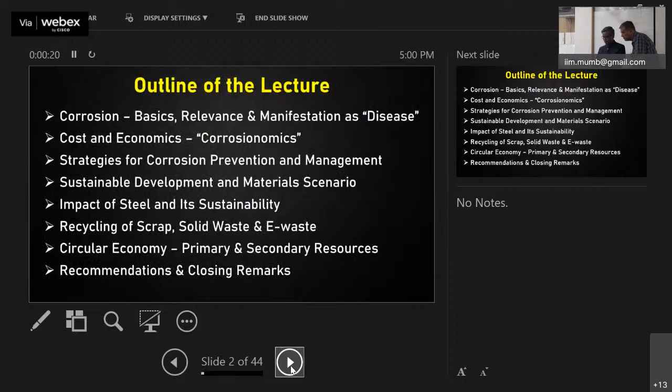Every week, huh? Good morning. Okay, yeah. To get it, huh? Is that it? Yes, sure.

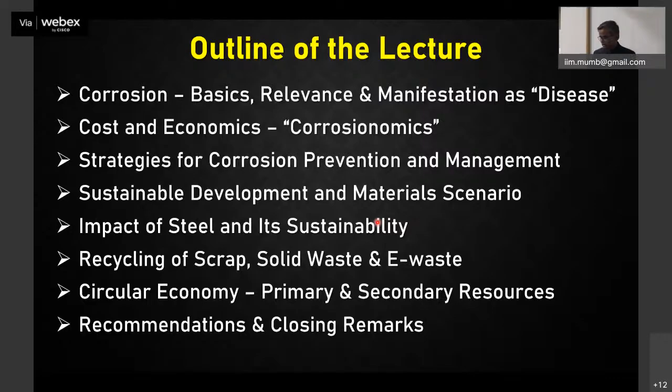The first question that comes to mind for anyone unaware about metals and alloys is that, except gold and platinum, all metals will corrode in service. Steel is a beautiful example: just finish and polish it, keep it outside, and within seconds or minutes you will see the first layer of rust covering the entire surface.

If you look at the corrosion cycle, every metal is available as a mineral compound in the earth's crust. You mine it, excavate it, do mineral beneficiation, then melt it, grind it, make alloys, and fabricate them into various products that can be put into service in industry.

And there comes the role of corrosion, affecting the service life of these components, where corrosion plays a major role, either due to an intended corrosive service environment, or due to external air, moisture, or environment. Finally, corrosion becomes one of the major degradation mechanisms, causing components to prematurely fail, and you lose the metal there.

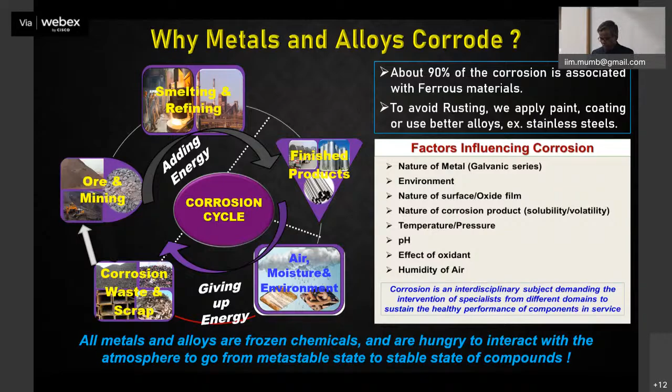For the betterment of the students, the young students here, corrosion is a very simple subject, but we make it very complex. We think so many chemicals are involved, so many things are happening just for rusting. If you write 10, 20 equations, you get an allergy for it - so many equations are brought in, Nernst equation, Butler-Volmer equation, so many things are brought in.

As simple as this: you put a small iron piece into dilute hydrochloric acid, and immediately, in a few seconds, it's seen bubbling. A very simple reaction is happening - iron reacts with hydrochloric acid, producing iron chloride and hydrogen. I can split this into two simple reactions: the metal going into a higher valence state as an ion, releasing its valence electrons. Fe becomes Fe2+ with 2 electrons, or Fe3+ with 3 electrons, depending on the number of valence states - aluminum 3+, niobium 5+, titanium 4+.

You can think of this for any metal that you put into an acid. Acid contains a lot of hydrogen ions, and these ions can get reduced by consuming the electrons. When you put a metal in, it simply dissolves into an ion, releasing electrons. The electron is just taken by the hydrogen to become hydrogen gas.

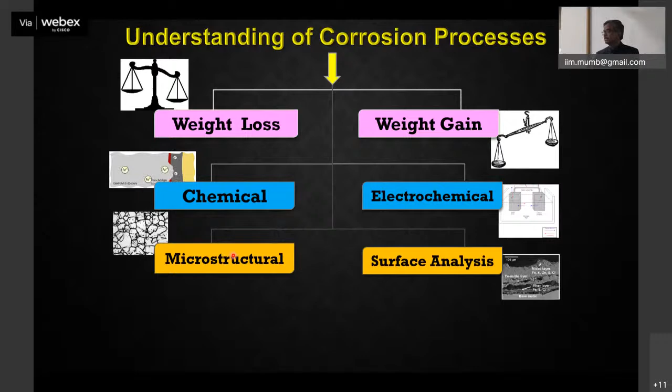Then came very strong metallurgical and surface modification analysis, where the microstructural effect was given structure-property relationships. What is the microstructure? You take stainless steel, there's welding in your group, there's a delta ferrite coming - in some cases that will have a problem. Otherwise you heat treat it, it gets sensitized, forms chromium carbide in the grain boundary, and that leads to chromium depletion. So it depends on the microstructural condition and the surface layer. If you're doing nitrogen ion implantation, it forms a layer less than a hundred angstroms - very thin, but it gives the highest protection, as in an orthopedic implant made of steel in the human body.

So depending on the surface, depending on the layer formed, the microstructure - more and more chemical and metallurgical interdisciplinary theories developed. Today, with the advent of scanning tunneling microscopes and similar tools, we are going more and more into the nano dimension to understand alloy dissolution theory, kinetics of alloy dissolution. The same way you can understand deposition starting from atomic scale, so you can make nano layers, multi-layers for electronics and other applications using this principle. This is what's happening with respect to understanding corrosion.

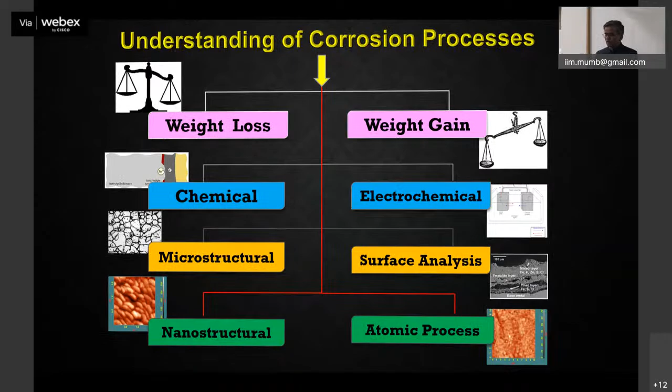But corrosion always initiates at the surface - with every metal, whatever you have made, there is a discontinuity at the top surface. You have dangling bonds, they're highly energetic, looking for interaction with the atmosphere. So you always have corrosion initiating at the top surface.

There will be so many imperfections - some secondary precipitate, grain boundaries, dislocations cutting at the top surface. You will have a lot of such defects on the surface where corrosion can initiate - at the grain boundary, at some inclusion, or secondary precipitate. Even in a single crystal, there will be a lot of kink site atoms on the surface, extra ledges. So whatever is there, corrosion can initiate.

It's not only this surface heterogeneity, they also need a suitable environment that will accelerate the corrosion. It can be neutral, acidic, basic, or anything - atmospheric corrosion, aqueous corrosion, or a gaseous environment. Corrosion will initiate at the surface.

Once it initiates, that is what corrosion is - something happening on the surface. As everybody knows, corrosion as rusting - the rusting is uniform on the surface, you will see. Take a stainless steel, there is nothing like rusting, you won't see anything, but one day you'll find the stainless steel completely breaking into two pieces. That is because it can undergo stress corrosion, maybe in a chloride environment. People say that even in ambient conditions this can happen.

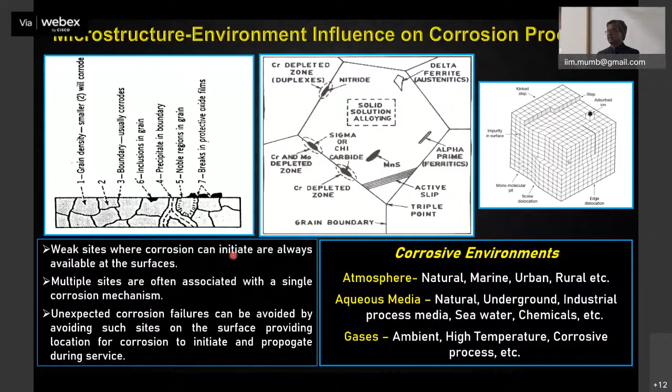So there are a lot of opportunities for corrosion to manifest into different forms - that is where the types of corrosion come in. Earlier, people knew that there are 8 forms of corrosion. If you take the Fontana and Greene or the Clay book, you will find 8 forms - famous lectures that will be conducted. Today, microbiologically influenced corrosion is the 9th form.

So uniform corrosion is the one that is rusting, whereas other types of corrosion include pitting corrosion, formation of a hole; crevice corrosion between two joints; intergranular corrosion, between the grain boundaries; and hydrogen embrittlement - hydrogen is very light, it can penetrate wherever there are cavities or defects in the metal matrix.

Galvanic corrosion - between two dissimilar metals, the weaker one will undergo corrosion. Erosion corrosion, where there is a flow medium involved. And fretting corrosion - very low amplitude of movement, very low frequency, like orthopedic hip joints in human body fluid conditions can undergo that kind of fretting damage. Stress corrosion cracking, you must all know very well - Raja is a very established person on that.

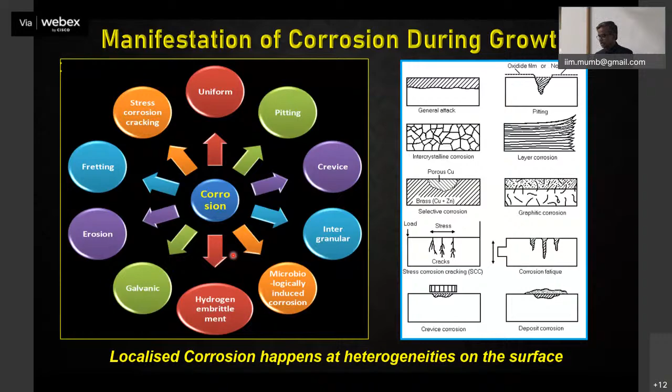So these types of corrosion lead to growing damage in the component. So what happened with the gas around - 40 metric tons sitting in the tank? This tank was overpressurized during the studies. There are two things - one is corporate mismanagement without any safety protocols, second is human error, people just not following the rules there.

So that led to a runaway chemical reaction because of the rusting that happened - the iron in the rust reacted with the methyl isocyanate and led to a chemical reaction. That caused a huge explosion of the tank, and the entire 40 metric tons of gas came out, leading to 5 lakh people instantaneously getting affected in Bhopal. So just imagine that simple corrosion, rusting, where iron oxide is produced - in fact, it is the same thing.

So what are the impacts? Wherever corrosion is happening, whether it is in an industry like the Bhopal gas tragedy with the Indian plant, or in a public place like a bridge, a water tap, a pump, or a water pipeline, anything you see in public or in an industry, when corrosion leads to failure, the impact is going to be very significant.

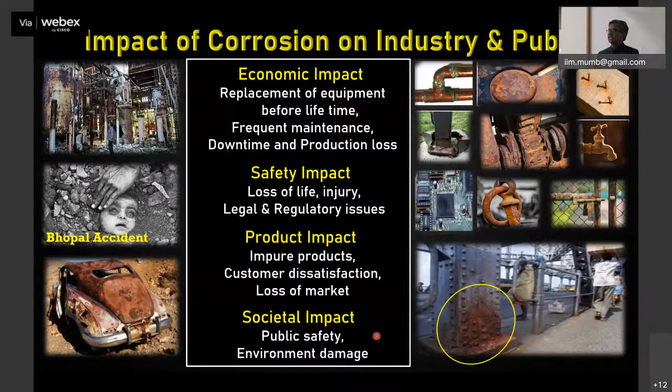Then there's customer dissatisfaction. If your product is compromised, having more unwanted elements when you look at the chemical assay of a product, then the customer is not satisfied. They will also lose the market and go to the competitor for better products. Finally, the societal impact: public safety is affected, as in the Bhopal tragedy, and the environment is getting damaged. So all these impacts of corrosion in industry and public life lead to loss in economics.

It costs so much, it has so much impact on the economy. In the year 2002, the United States Federal Highway Administration, on the instruction from Congress, conducted a corrosion cost study that found around $276 billion in costs in the United States.

Recently, in 2011 to 2012, NACE International, the National Association of Corrosion Engineers, conducted a study called the IMPACT study, that is, International Measures of Prevention, Application, and Economics of Corrosion Technologies. They found that the worldwide direct cost is about $2.5 trillion, which is 3.4% of the GDP of industrialized countries.

You can see here that the average is 3.4%, and the United States is about 2.7%. India is here at about 4.2%. And if you look at Japan, which is most advanced in corrosion control technology, it's 1%. So the average is about 3.4%.

The GDP of our country is $2.94 trillion in 2019. If I take 3.4% of that, it's about $102 billion, which is roughly 7.2 lakh crore loss. This is huge money that could be used for at least 2 or 3 states' annual budget in India. So that is the loss that we make, but it never gets attention in this country.

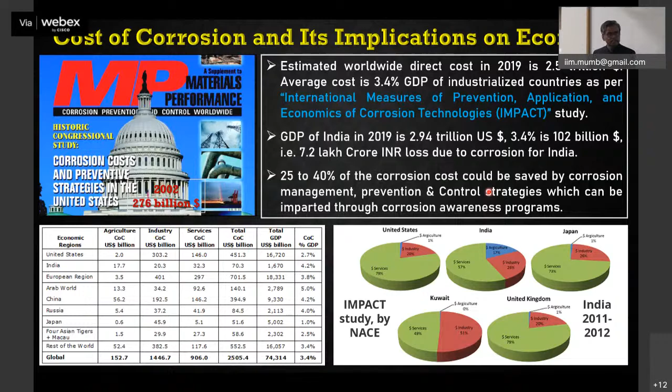If we let that happen, corrosion is happening now. How can I reduce this cost, and is there a simple method? There are different ways that one can do this.

Starting with the proper selection of material, maybe the first choice is that you have chosen a correct material. Second, you should adopt best engineering practices when fabricating, building, or treating the metal component before putting it into service. Third, besides the choice of material and fabrication procedure, you use protection like cathodic protection or anodic protection.

Then, even if you're not able to control it with that, you go for a higher alloy, a better alloy. Maybe steel is not useful, so you go for alloy steel. If alloy steel is not better, you go for stainless steel. Not good, you go for nickel alloy. You can go for titanium alloy, zirconium alloy, depending on the requirement.

Then, for something like a cooling water system, almost every industry will have one, and corrosion inhibition is very important. It looks like a routine thing, steel and water combination, but it causes huge economic loss in the country. So corrosion inhibitors can be protective metallic or protective organic coatings.

This is the kind of toolkit that I would recommend people use for managing corrosion and saving costs. But the problem is that we know all this, so how do we apply it? This is what is very important. That's where you have to become a specialist who can do this.

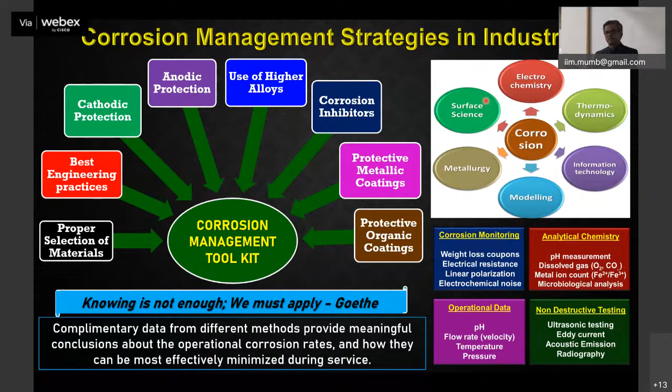You cannot just monitor the water parameter in the pipeline and expect to control the corrosion. Or just monitor the integrity of the pipe and control the corrosion. It is not possible. It is an interdisciplinary approach that you have to use for corrosion management.

I want to stop the corrosion. So what are the things I can do if I know the management tool? Number one, I should put in engineering practice, choosing the best material-environment combination based on experience and literature.

Second, I should reduce whatever possible stresses during application, whether residual or service stress. But one more important thing: whenever you use any code, practice, or procedure, it has to be followed completely in the design, fabrication, and operation.

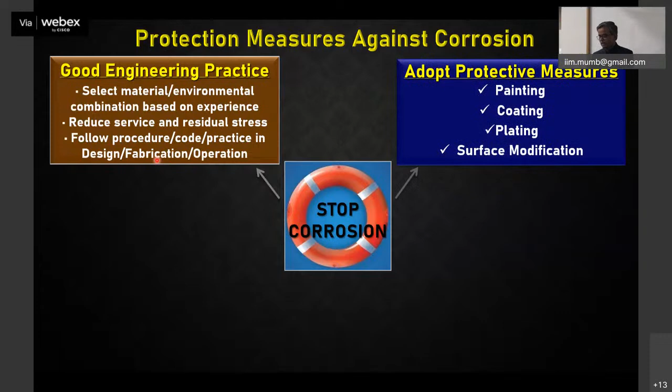You should also have some protective measures, like painting, coating, plating, and surface modification, better material, improved material, and an improved environment. You have to use some inhibitor, some quality control, and some online injection of certain chemical species. So whether it is an engineering practice, a protective measure, a better material, or a better environment, all of this can stop corrosion.

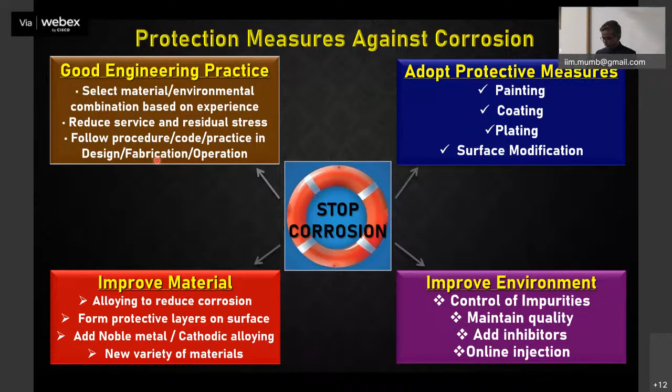But ultimately it cannot be 100% stopped, because corrosion is a natural phenomenon, it will happen. We are only delaying it so that we can use at least 90% of its performance, not 100%. So what are the preventive strategies in management and prevention control?

We should, in the beginning itself, try to have the life prediction, life cycle, and performance assessment of the component, so that you anticipate, after so many cycles of service or years of service in the plant, what problems will come. By envisaging this in advance, you should take adequate preventive steps at the right time.

You should also have some innovative corrosion technology tools. Many of them have to be established through research, development, and implementation. For example, some online corrosion monitoring tools, innovative tools like electrochemical noise, a new technique.

Now, how can we utilize this electrochemical noise to understand the fundamental signature of current that is coming over? The electron release is nothing but the current. So how finely can I measure this? This is like a signature of the initiation of the corrosion. So all this can be done through research.

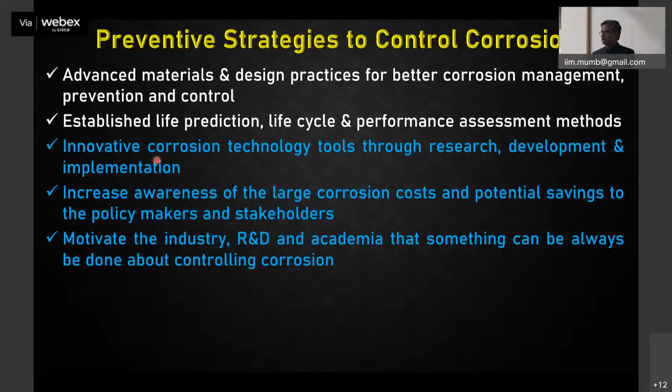Then increase the awareness. That's very, very important. The management should be made aware that most of the time the failure that is happening, the root cause is corrosion. We can control and prevent the corrosion and save. Then we should also motivate the industry and academia that corrosion is not something like a hopeless thing. Corrosion can be controlled if it is properly understood and proper measures are being taken up.

Not only that, the industry or the researchers and academia, the government should have some policies, regulations, standards, and management practices to increase the savings that will happen if we control corrosion. In our country, so far, there is nothing happening with respect to corrosion control, and that is one thing - the corrosion awareness and a national corrosion mission or control that should be taken up.

Finally, there should be more and more education and training in corrosion control, which is required, not only to those who are working in the field, but also to the top management - the owners, chairman and MD - all of them should be aware of this.

Very happy that IIT Bombay started MTech in Corrosion in 1982. No other IIT has started this. This is the only IIT which is continuously bringing this awareness, bringing the mentoring, and bringing up a lot of young talented people in the whole country.

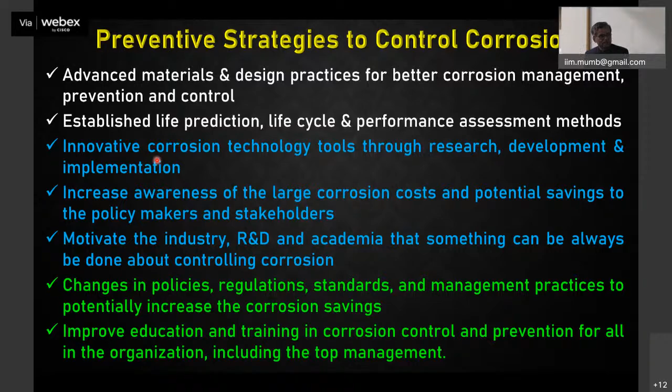So what shall we do in our country? Suppose we want to have sustainable development. Sustainable development means we have a better living condition with respect to security, water, infrastructure, healthcare, education, and many things. So where is this going to manage this? Corrosion has to be managed because we want to use all the metals and parts in a sustainable manner.

The first thing is that corrosion has to be accurately predicted for the country, and we have to establish a lot of new methodology for that. Second thing is that there should be a national corrosion mission.

There are so many energy missions. There are so many food and water missions. There are many energy and green energy missions. But we don't have - we never heard about - a national corrosion mission. And also something like the Bureau of Corrosion Control. Bureau of Energy Efficiency is there - the energy efficiency monitor. Using the effective use of power energy is always certified by government agencies, and you are given some reward. So we should also have such things for corrosion control.

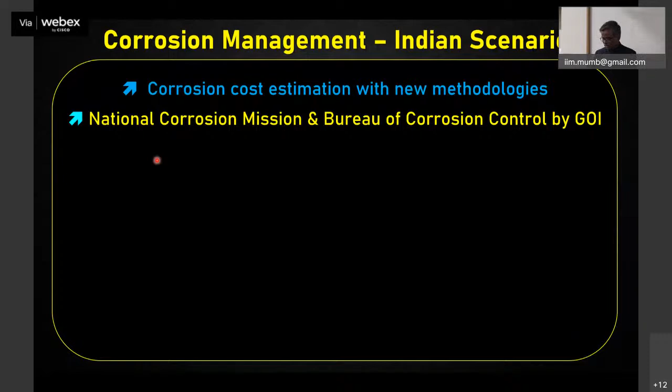And there should be established corrosion control guidelines, particularly targeted to the SMEs, which is not available. Even bigger institutes, like Reliance, don't have any well-established corrosion control. And then online monitoring is very important, which we don't do in our country. We are not well established in that compared to Japan, USA, and Germany. And we should have R&D thrust on new control methodologies to save in economy, energy, and materials.

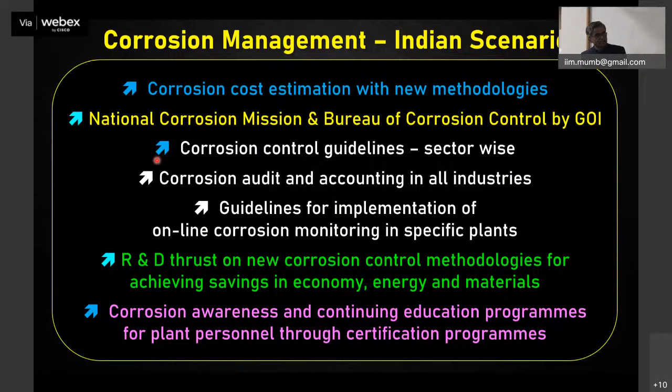And of course, finally, we should have a lot of certification programs for corrosion. I would recommend that IIT Bombay should conduct a lot of training programs and certification programs in corrosion, which will be highly attractive for a lot of people, particularly in the pipeline sector, where there is going to be more than 80,000 kilometers of pipeline coming in the next year. Several corrosion issues are there with respect to the transportation of various ingredients in pipelines, including future hydrogen gas. I think there should be some specialized training programs for this.

That is the corrosion aspect I have told about. Now I am going to move to one of the determinants for this. As I told, Agenda 2030 had 17 goals with 169 targets identified by the United Nations Assembly in the year 2015 for a better and sustainable world by 2030.

Out of this, you will find that at least 7 of them are directly related to metals and alloys. Unless you have sustainability for metals and alloys, you will not be able to have sustainability. All these metals and alloys required for this, particularly for these 7 sectors, we need to have that.

So we have either the production of the metals and alloys from the minerals or from the scrap, and we go to the products. As I said, either we dispose it as waste, or it undergoes corrosion, or we have to go for recycling. Recycling is the way where we can go for sustainable routes, where we can continue to use the metals and alloys for a long period. Whatever is going as solid waste, the corrosion that is killing components prematurely, or waste like electronic waste, all of that has to be recycled—only then will we have sustainability in the future.

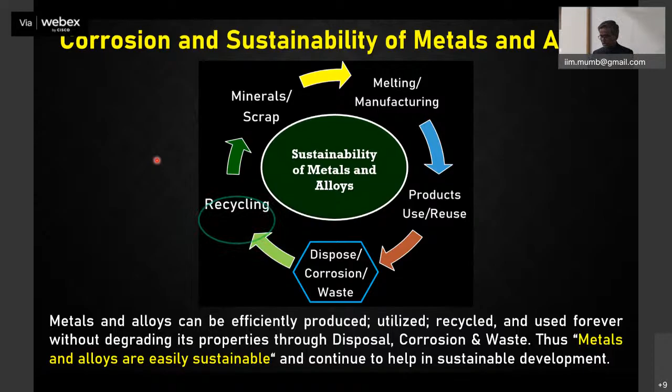So just briefly, I would recap: you have aluminium, then iron, then calcium, sodium, and so on. Iron is in 4th place—it's the 4th most abundant metal available. In the year 2019, about 3 billion tons of iron ore was taken globally. Out of this, 94% was utilized for making iron and steel. You can see the massive way iron ore is being consumed by us, which has limited resources. The remaining 6% is for other metals.

According to circular economy figures, the world consumes 100.6 billion tons of materials annually, and out of the 3.2 billion tons of metals produced in 2019, this accounts for only 3% of the overall materials.

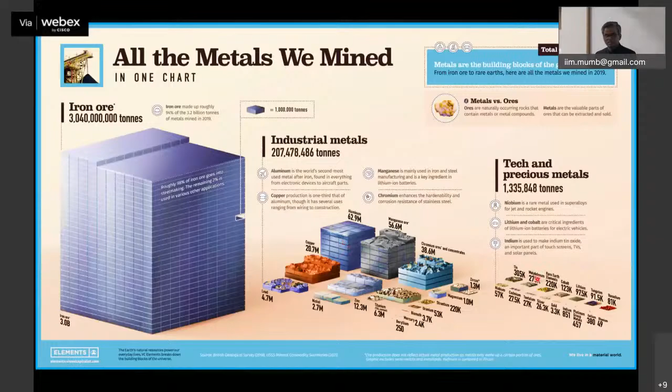This is shown in a pictorial way. You can see this is the iron ore that we are mining for producing steel, and copper, aluminum, and so on. Then you have the precious metals, the noble metals, and so on. Of course, steel is the king of all materials, as I've said, 98% of the ore that is taken is only used for making steel. It's a permanent metal used for all applications.

What is very important is there are 3 different ways in which steel is produced. One is secondary steel through scrap in the electric arc furnace process, and this is the process where 30% of steel is produced today. The other is primary steel production from iron ore—that is the blast furnace and basic oxygen furnace process. That accounts for 70% production, and this is where more and more CO2 is coming into the picture. We want to reduce this 70% and increase the 30%.

Where CO2 release is lesser, but it is energy intensive. You need 2.3 gigajoules of electricity required, whereas it's not that significant in blast furnace technology, where you need more coal—you need less coal in the electric arc furnace. One advantage is that in the electric arc furnace process, you can use 100% scrap. This is going to be the sustainable technology, where the entire scrap you have can be put into an electric arc furnace to produce steel.

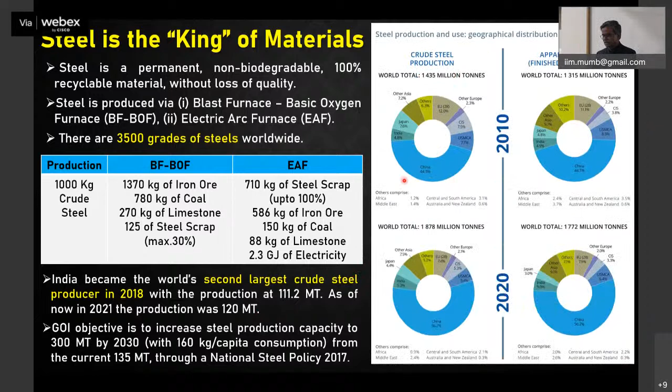If you look at world global crude steel production, China is the leader—around 55% of the steel produced in the world is from China. We are very limited, about 5%—you can see here, somewhere very small, that's India. But we are number 2. Our production today is 120 million metric tons, while China's is 1,180 million metric tons. So you can see the difference.

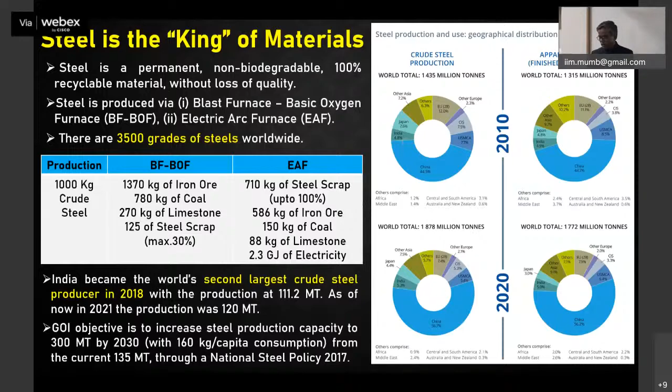And that is the kind of steel production they make in China. If you look at the world steel production and consumption from 1950 to now, you can see it starting with 189 million metric ton. Today it has become 1,878 million metric ton. Please convert this into the iron ore that we have mined.

So that is the kind of steel that is produced, and all this steel, whether structured or not, why do we keep on producing this, why do we keep on increasing this production?

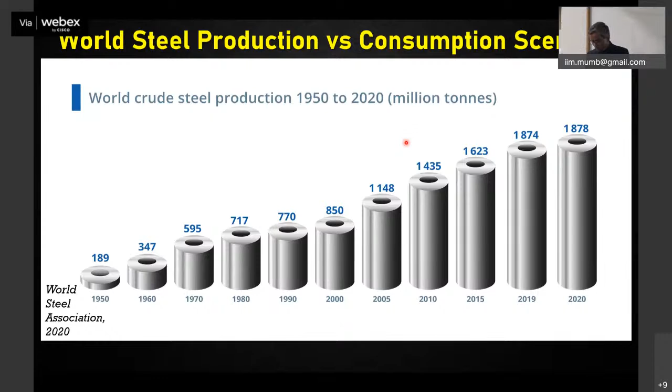That's a big question. If you look at the overall production in 2020, China, because of corona, had a reduction to 1,064 million metric ton. India is at number 2 with 100 million metric ton. USA is producing 72 million, Japan 83 million metric ton, Russia 71 million metric ton. Almost the whole world is producing without any break.

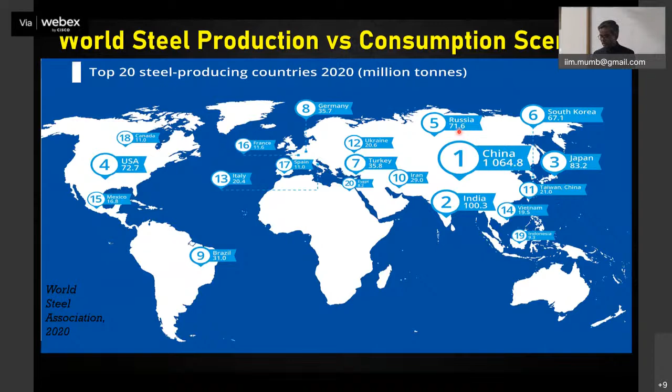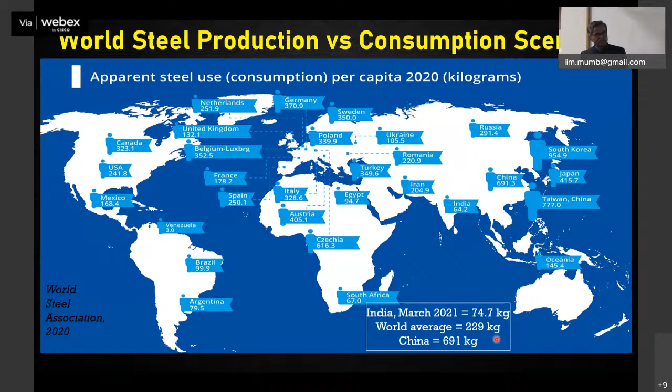If you look at per capita consumption, India is about 64.2 kg, China in 2020 is 691 kg, while the world average is something around 229 kg. So steel is being produced and consumed at a very high, very fast rate, and that means iron ore is being mined and then used for various applications.

If you look at the applications, today India is using maximum in construction. India is now called IUC, India Under Construction. So everything is under construction. Anywhere we go, there will be a lot of steel lying there, whether it is going to be used or it has already come for application.

There are a lot of applications in capital goods, automobile, and consumer goods, railways. There's going to be a big impact on the railways application. Except for this corona period of 2021, we have steadily increased production. If you look at the compound annual growth rate, it is around 6.5 today, and it is predicted that it will go to 7.2%. That is the rate at which we are producing.

If you look at the total production of steel, only 20% is from the government, that is SAIL, Steel Authority of India. The remaining 80% comes from private players. Production is actually in Jharkhand, Odisha, and Chhattisgarh. In Jharkhand you have Tata Steel, in Odisha you have Kalinga with a number of plants. Then in Chhattisgarh you have JSPL, Jindal Steel Power Limited, and in Karnataka you have Jindal Steel. So India is now second in position because of private players contributing so much.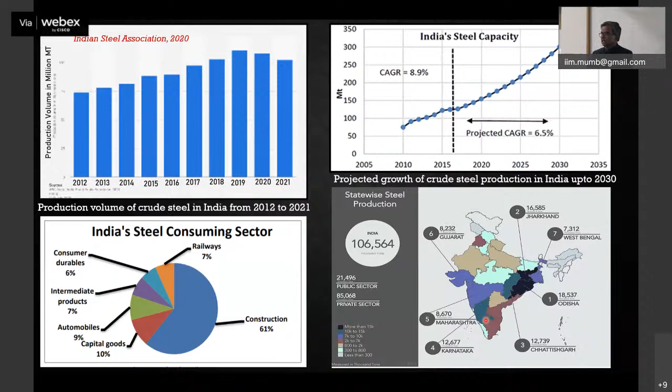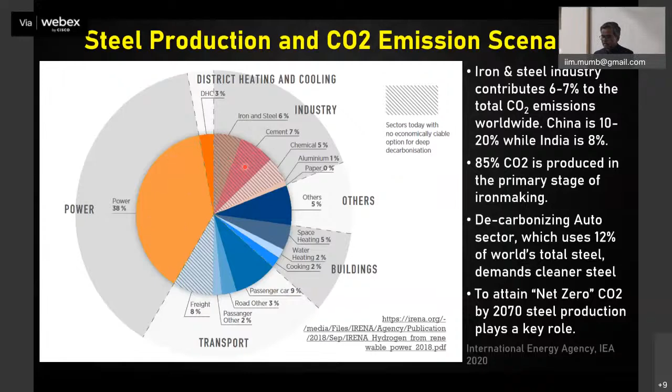So when we produce more and more steel, not only do we worry about the iron ore required for future generations, but also the rate at which we produce CO2, which is something that we cannot decarbonize easily. If you look at the iron and steel industry, 6% of the CO2 produced comes only from steel, apart from other contributors. Actually the maximum comes from fossil fuel based power plants, while iron and steel plants give about 6%. That is the important thing.

Now there is a target set by the Paris Agreement in 2015 that by 2050 we should reach net zero CO2. Recently, after the Glasgow conference, they have shifted the date to 2070 because it is impossible to make net zero CO2 by that earlier time. These are the various sectors by which CO2 is produced, today roughly around 35 gigaton of carbon dioxide per year, and we want to bring it to zero by 2070.

If you look here, around 6 to 7% of the gigaton CO2 per year is from the steel plants. So the iron and steel industry is producing about 6 to 7% average CO2. China produces about 10 to 20%, India is producing about 8%. 85% of the CO2 comes from the primary steel making process, the blast furnace and basic oxygen technology, which uses coal heavily. For every ton of steel, we use about 750 kg of carbon coal.

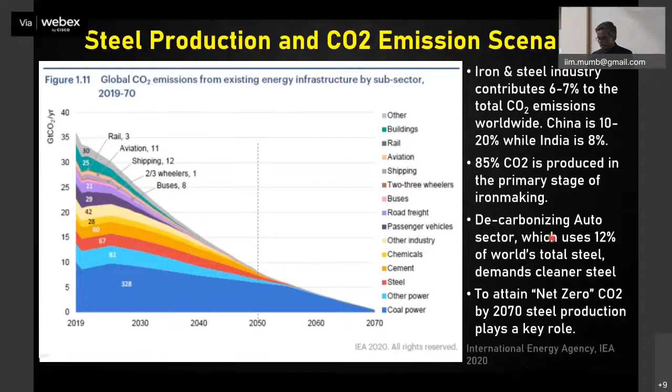For decarbonization, you also see, for example, the auto sector uses about 12% of the steel. If we can reduce the use of steel in automobiles by using more magnesium or aluminum and other parts, then we can also bring down the use of steel and make available more iron for the future. But there are lots of innovative technologies that are coming to reduce the CO2.

On average, 1.83 to 2.21 tons of CO2 are released for every ton of steel produced. The target now is to reduce 50% of the CO2 produced during primary steel making, which comes from the chemical reaction.

As you know, iron ore reacts with carbon from heated coke, producing iron and carbon dioxide. The second approach is to introduce hydrogen as a fuel, or at least begin by mixing hydrogen as a replacement for coal and coke, so that CO2 emissions can be reduced by at least 20 to 30%.

The third approach is a totally innovative technology. Basically, you take iron oxide along with some silicon dioxide and calcium oxide, make a melt at 1600 degrees using electricity, and do electrowinning, by which you can extract iron from iron ore. This is going to be a breakthrough technology, but you have to use green electricity—electricity that doesn't use coal or coke and doesn't produce CO2. So you need solar PV based energy, and then through electrowinning you produce 100% green steel.

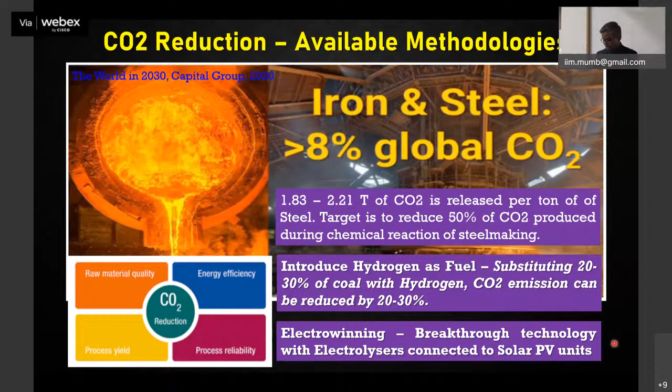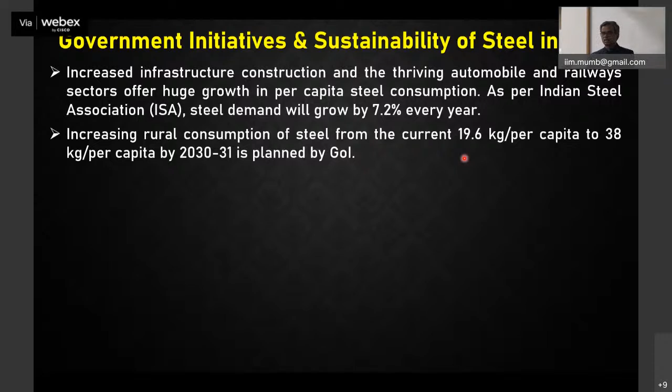The government of India is also considering that there will be 7.2% growth in steel demand, with a target to increase consumption in the rural sector since the urban sector has already seen extensive steel application. They are pushing for higher steel production, increasing export duty, and increasing import duty on steel items so that we don't import iron ore or steel from outside, along with anti-dumping and safeguard duties. The government wants the steel sector to grow in multiple ways so that our current 64 to 70 kg per person consumption increases to at least 229 kg, the world average. We cannot go to 700 kg, which is the Chinese per capita consumption.

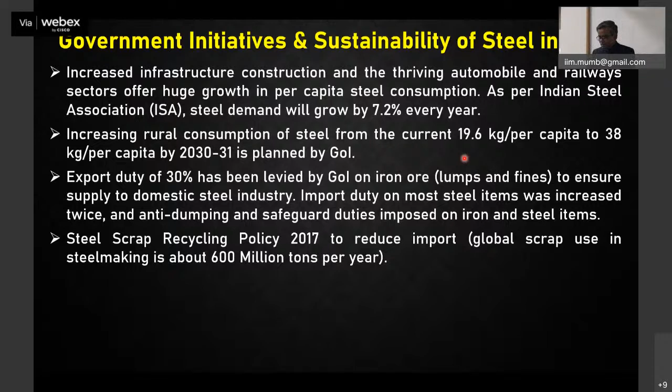Another important policy we've introduced is the use of scrap. Globally, 600 million tons of scrap is produced in steel making, both in the primary and secondary sectors. This is another important factor.

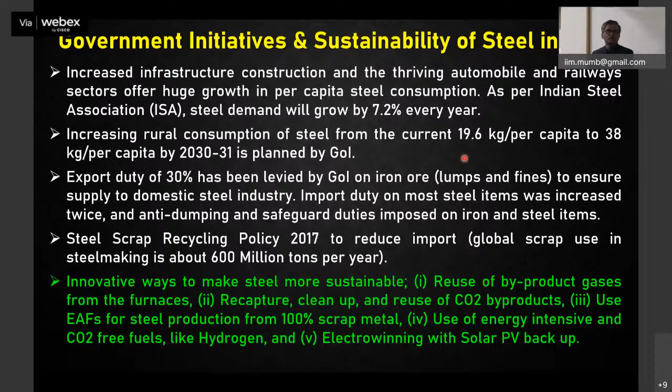Finally, sustainable steel production is possible only when you reuse byproduct gases from furnaces—recapturing, cleaning, and reusing CO2 byproducts. Then there's the use of electric arc furnaces for steel production from 100% scrap steel using electric energy, and the use of energy-intensive CO2-free fuels like hydrogen, along with electrowinning using solar PV. This will produce green steel and make steel sustainable for the future.

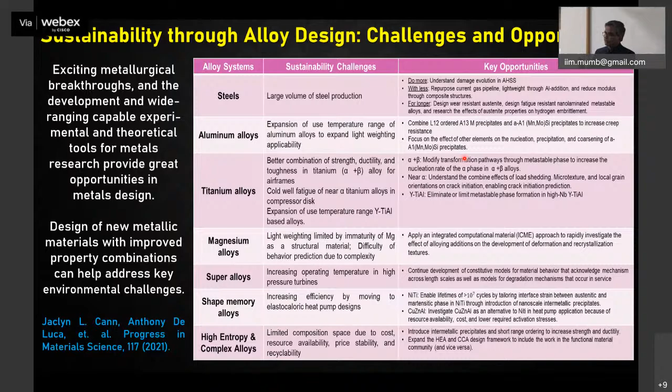This can also be achieved through alloy design. You can create a better alloy that resists corrosion and works for a longer time. A variety of alloy steels can be produced using modern metallurgical characterization techniques and design concepts, allowing one to create an excellent alloy that works for its entire predicted lifespan. This is also possible for other alloys like nickel alloys.

Why did I include this slide on nickel alloys? Over the next 20 years, it's projected that more than 38,000 new aircraft will be produced worldwide—38,000 new aircraft—because passenger transportation is increasing rapidly. That means nickel-based alloys will be used extensively, along with titanium alloys and steel. So we're going to need more and more of these materials.

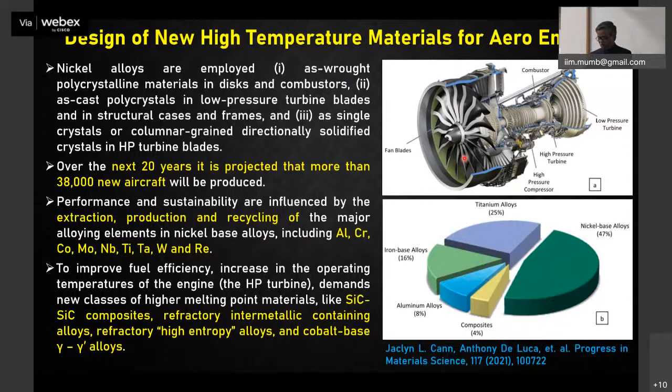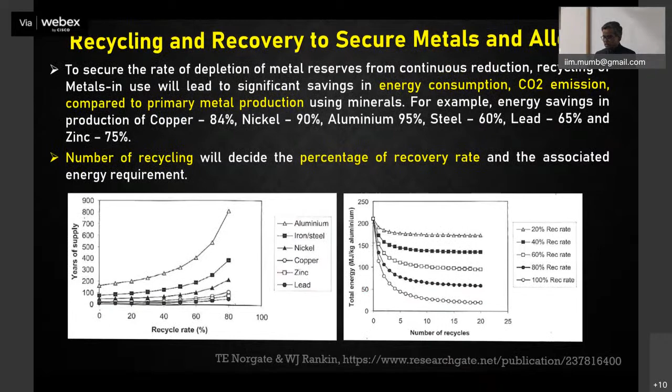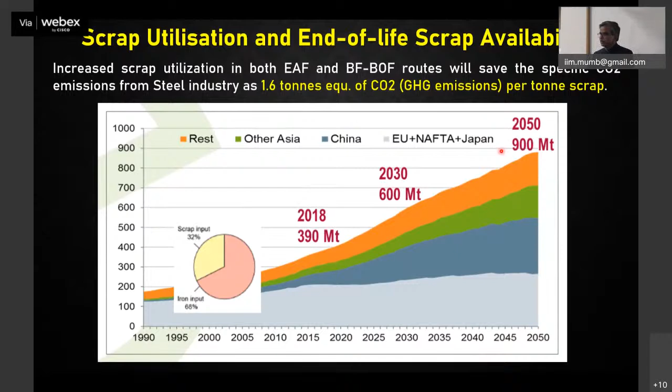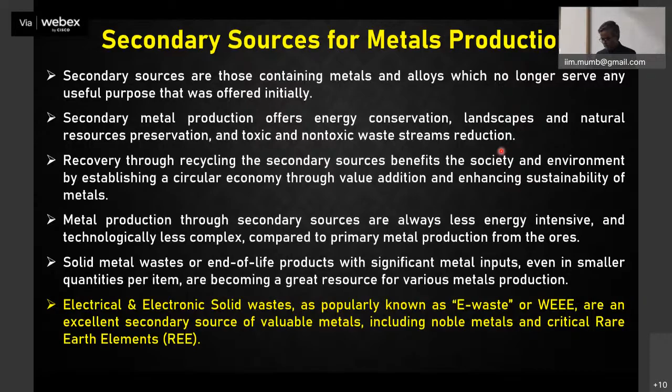All of you know e-waste is nothing but electrical and electronic equipment, in whole or as a part, that is this product. The metallurgists have a great role to play in recovery of the metal that is put into this product, now becoming waste, and then reuse them.

That's very important. Some of the critical metals are possible to be recovered from e-waste, but it's highly complex because it's not like taking an iron ore where you get iron and leave the rest as waste. Here, if you take a PCB board, there are so many components and so many metals associated with it. So you need some technology, some innovation by the metallurgists to identify and isolate each and every metal so that finally you get back those metals.

The energy supplied for this process will be much less than the primary metal production.

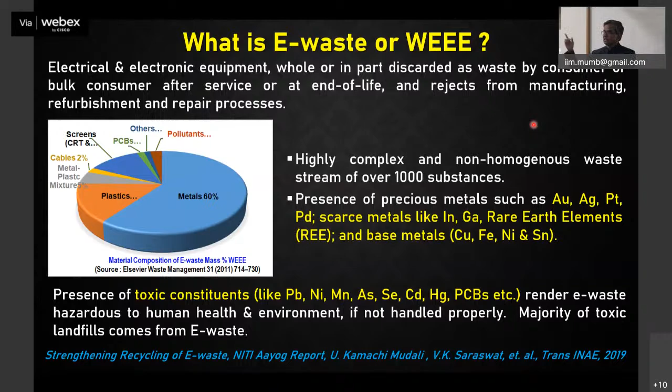If you look at the worldwide generation of e-waste, it is 53.6 million metric tons per annum, costing about $57 billion. It is quite increasing, 21% in the last 5 years, and it is expected that by 2030 it will be 74 million metric tons. The estimated value of recoverable material after processing is 25 million metric tons.

If we process this 53 million metric tons, 25 million metric tons per annum can be recovered, reused, and remanufactured into products. But what we are doing today in the world scenario is only 9.3 million metric tons, only 17.4%, getting collected and recycled. We are losing too much into landfills, scrap yards and waste.

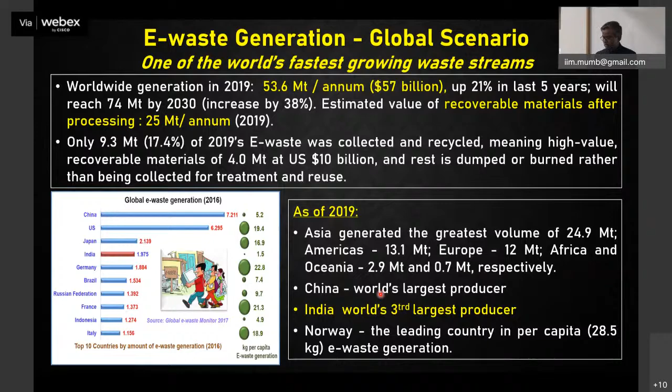India is the world's third largest in e-waste production; of course China is number one. In 2019, India produced about 3.2 million metric tons. We don't have much technology at the industry level, only at the pilot plant level. It is going to increase heavily with the years.

Due to pandemic induced consumption of electronics, it has been estimated 43% of e-waste has been generated in our country—just imagine. The waste coming from mobile and computers is going to increase 1,800%, 500% by 2020; this is the assumption made.

Mumbai is the number one city in India producing e-waste. It comes from computer equipment, medical equipment, electrical equipment, telecommunication equipment—not only from government, public and private sectors, but also from households and manufacturing sectors.

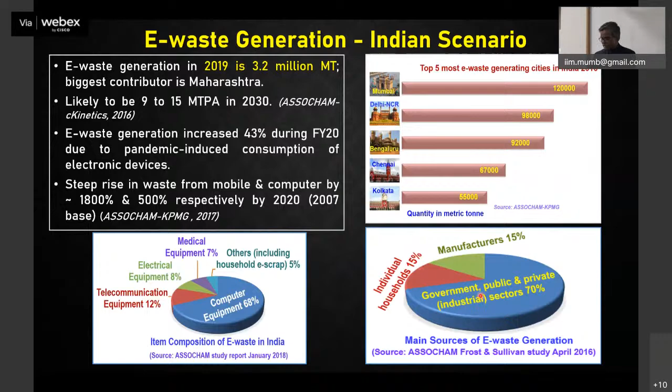We are only processing 1.5% of this e-waste, and we have only 300 registered recyclers with a capacity of 7 lakhs, whereas our production of e-waste is 32 lakhs. We only have capacity for 7 lakhs, and in 2016 we only processed 4 lakhs. So that is the situation.

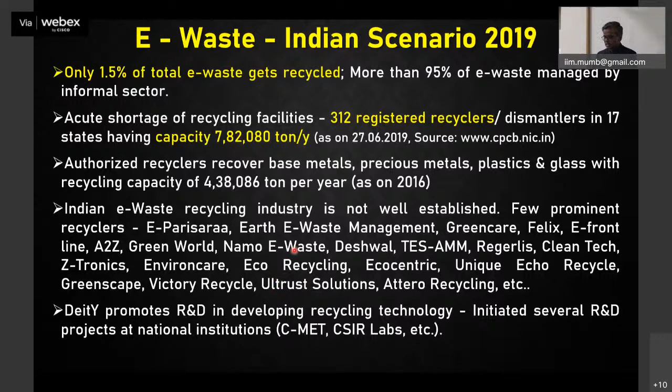There are some smaller vendors, small industries involved. The government is trying to support R&D for recovery of this.

This is called the world's capital, Moradabad, in Uttar Pradesh—the world's capital of e-waste processing by the unorganized sector. There are a lot of things done in a clandestine manner. Materials are collected there and used for extracting everything directly, burning the PCB. They try to collect gold because PCBs have a good amount of gold, so they extract gold to get a lot of money out of that.

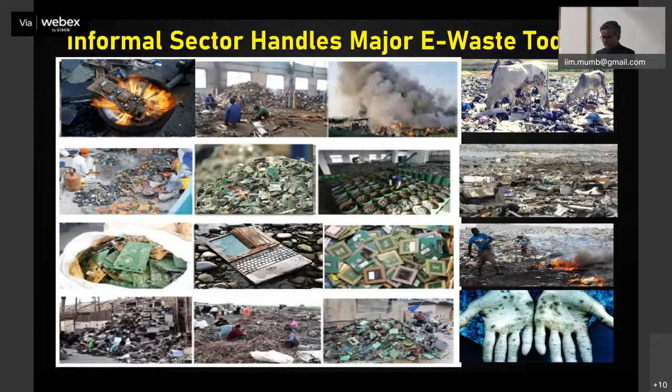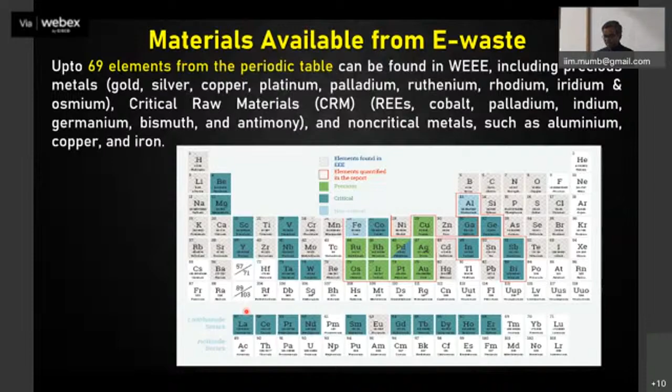E-waste has no limitation—it has been estimated there are 69 elements in the periodic table present as electrical and electronic waste. They are used in different forms: gold, silver, palladium, rare earth elements. Most of these are present here, measured in grams per unit. Each mobile phone—you can see how much it will be.

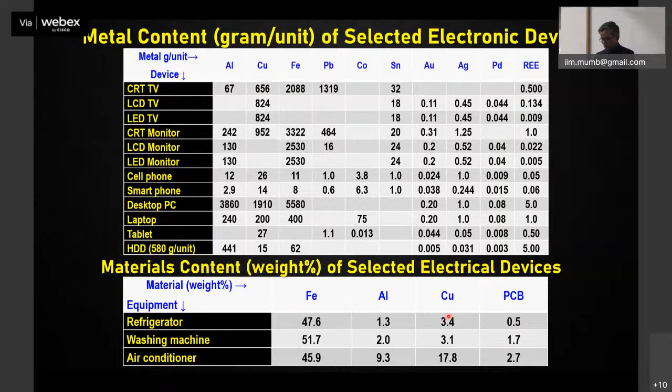You can find out from this smartphone how much is there. Similarly, electrical equipment also has major elements like iron, aluminum, copper, and so on. Particularly the PCB board has 25 to 30% of major elements like copper, and you get a huge amount of gold.

You can see that 320 tons of gold, which is 11% of world gold production, and 7.5 tons of silver annually produced, is available in this waste. These are all estimations. 25%, a quarter of copper production, we are getting from e-waste, and 22% of mercury used in the electronic industry.

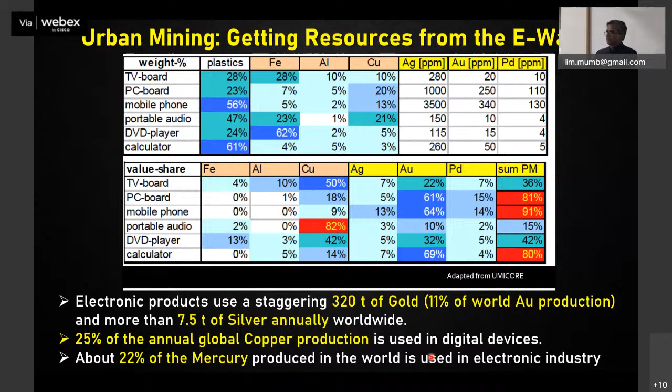So this is not getting recovered. This is also useful. If we can take this, then we can keep the remaining ores for future generations and make these metals sustainable in the world.

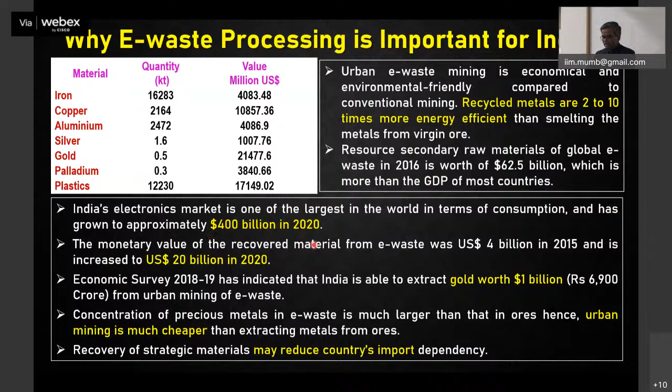As the electronic market keeps increasing in our country, the monetary value we can recover from these metals is going to be very high. It is estimated that in 2018-19, India extracted gold worth 1 billion from urban mining, this e-waste.

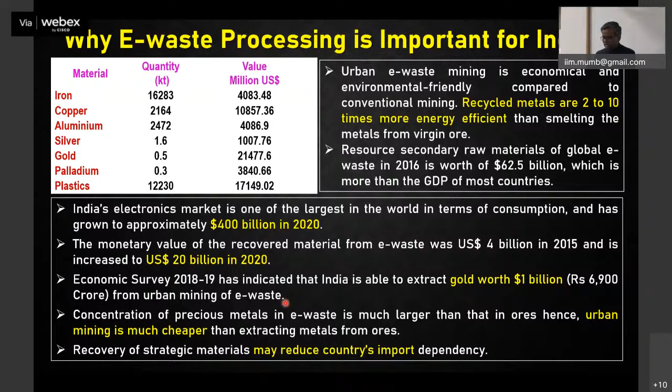So there are many unorganized sectors here, but recovery of all these metals is very important because urban mining, the secondary processing of e-waste, will have a reduced energy requirement, avoid pollution, avoid greenhouse gas emissions, and save natural resources.

The recycling of iron, aluminum, and copper will contribute to about 15 million metric tons less carbon dioxide than is produced otherwise from primary resources.

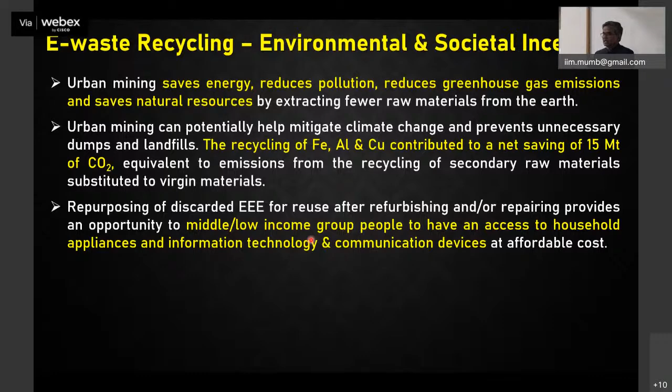Not only that, if you can refurbish electronic and electrical equipment, many people who cannot afford new ones will have an opportunity to use them. What you discard as waste can be reused by some people.

And finally, it can create a lot of jobs. There is going to be an e-waste processing industry set up in the country to recover these metals and make it sustainable. Statistics show that 4.5 lakh direct jobs and another 1.8 lakh indirect jobs can be generated.

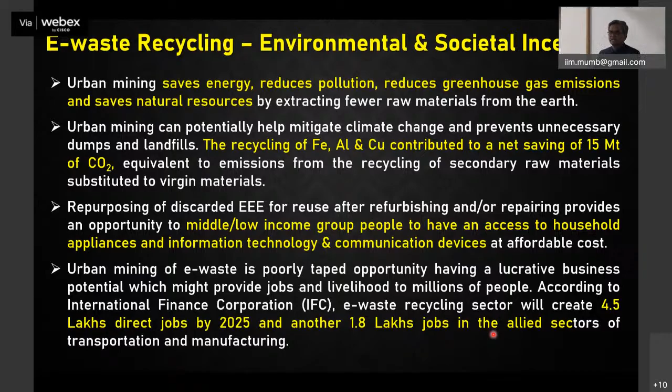So I am coming to the last part of my lecture, where I feel secondary resources like e-waste are key. Suppose we take 54 million metric tons at a per capita of 7.3 kg per person in the world. If we process and remove the valuable metals, it will be about 25 million metric tons. Suppose we want to produce the same equipment, about 53.6 million tons, you would need only 14 million virgin material, and adding this 25 million becomes 39 million metric tons.

That's because of technology advances in micro and nano fabrication. The same equipment that was made with 53.6 million metric tons can now be made with 39 million metric tons, by recovering 25 million metric tons from e-waste and only adding 14 million metric tons of virgin material.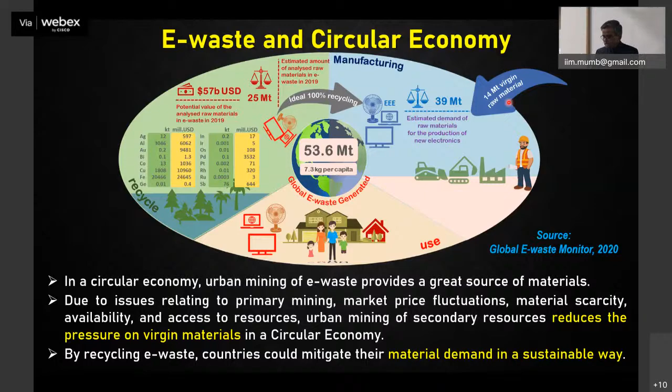That means we are going to use less and less primary resource. We are going to recycle this. This is what a circular economy is, making materials demand sustainable.

The same thing can be done with primary resources. Suppose we produce so many metals: iron, aluminum, titanium, magnesium. We only take the iron, but we don't take the other elements present, the other byproducts that come to the industry.

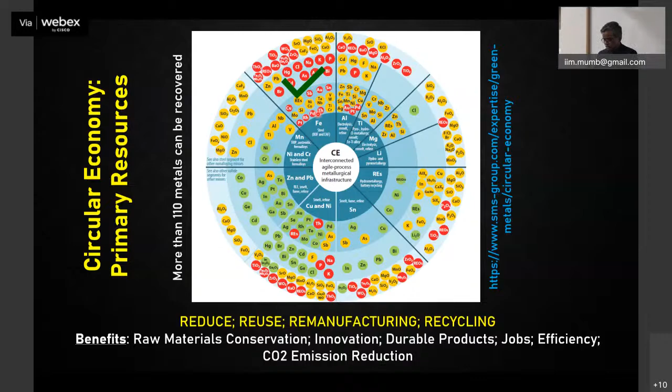If we can utilize everything, it will help reduce pollution, reuse these metals for various applications, and be most important for the conservation of materials and energy reduction, and so on.

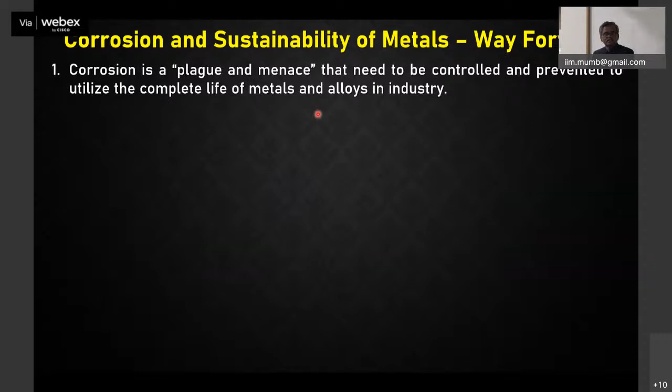So, my summary for the way forward: corrosion is dangerous and has to be controlled and prevented. Metals and alloys need to be utilized in a better, sustainable way in industry.

It is very important that we do life cycle assessment and risk management strategies for all components. Whenever installation or application happens in industry, this will help enhance utilization in an effective manner.

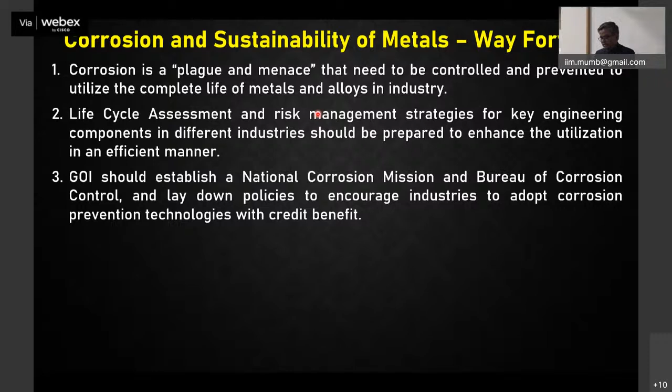There should be a National Corrosion Mission and Bureau of Corrosion Control by the Government of India. Also, government should establish well laid out policies and principles that encourage industry to adopt corrosion prevention technology for benefit.

Corrosion awareness, certification and training, and skill development in corrosion management strategies have to be evolved for all sectors including SMEs. We should have large R&D with very good funding and investment, not only from government but also from the private sector, for new corrosion resistant materials, processes and technologies, developing waste processing and recycling technologies on a long-term basis.

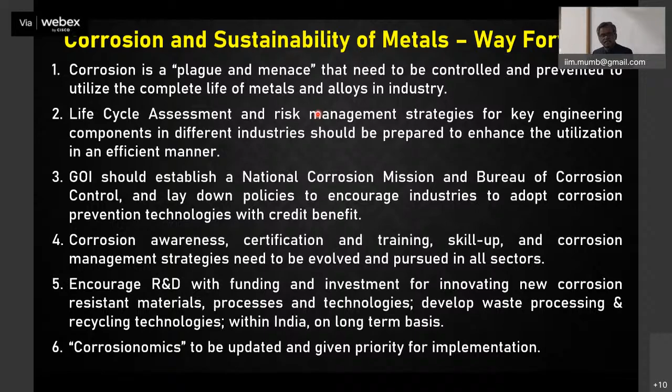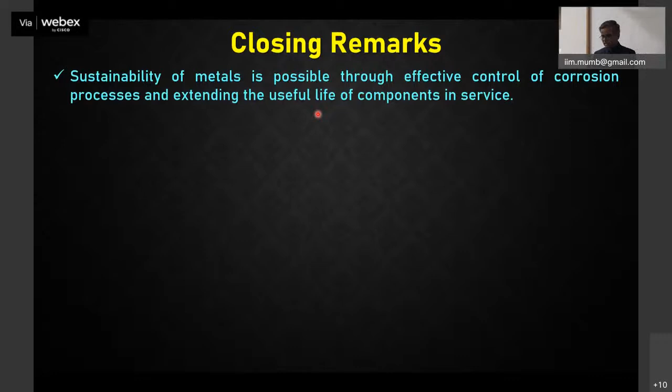So this is where corrosionomics can be updated, and there we have an opportunity to implement it with priority in the country. As a closing remark, sustainability of metal is possible through control of corrosion processes and extending the useful life of components in service. That is where corrosion technology plays a very good role.

Second, there should be a long-term strategy with a white paper on material resources available today. The resource is the unpredicted amount of mineral available, while the reserve is what is identified and can actually be mined from that area. We don't have all this information. There should be a white paper on the material requirement for various applications, and their life assessment and management for the complete service, or for the next 100 years, should be made.

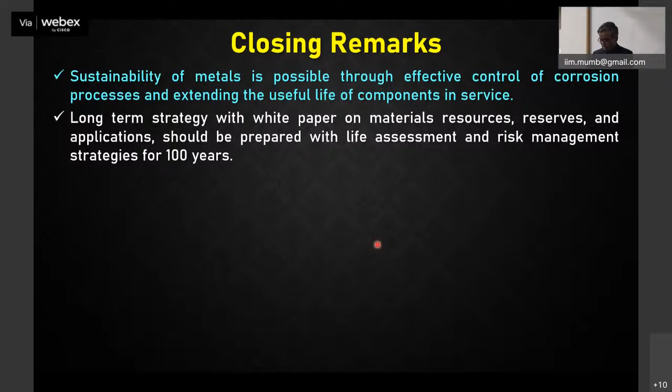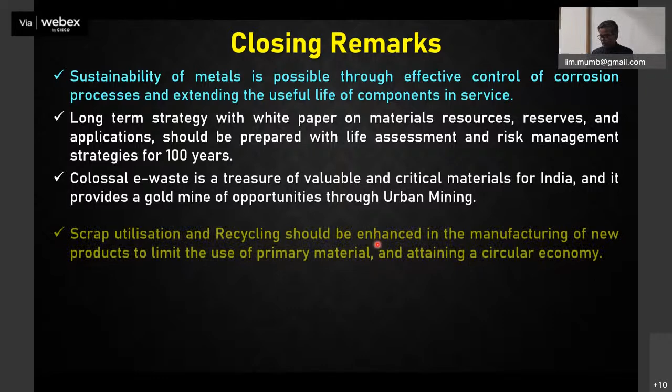E-waste is a treasure of valuable and critical materials for India and it provides ample opportunities for urban mining, which is very important. Scrap utilization and recycling would also be enhanced in manufacturing these products, to limit virgin materials and attain a circular economy. Very, very important.

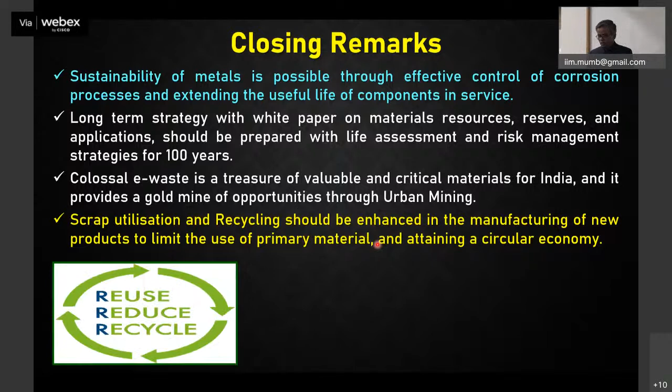So today we must pursue reuse, reduce, and recycle. This is required because all of us think we have inherited this earth from our ancestors, and we are just retaining it. Actually, that is wrong. We have borrowed it from our children. They are waiting for the minerals.

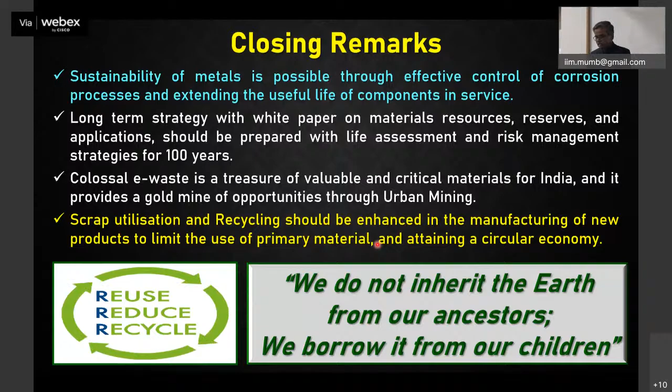We are holding the resources that are available for their survival and for their grandchildren's survival. We should not think that we got it from our ancestors and have the right to enjoy it all. We live in an unsustainable system, and there cannot be sustainable development without sustainability of metals and alloys. That is my closing remark. Thank you very much for honoring me.